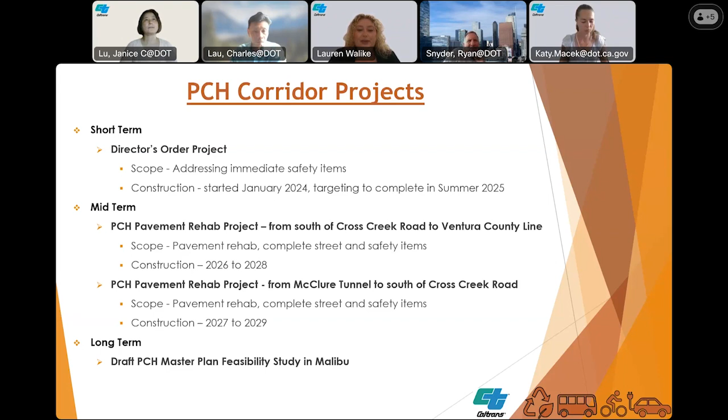You're on mute, Janice. Thank you for letting me know that.

Hi, good afternoon everyone. My name is Janice Lu. I'm the project manager for these two pavement rehab projects. Along with me, my colleague Refugio, who is the design manager, will be helping me present the scope of work as well. I'm going to dive right in.

The first project is this, the north segment of the project. This is about a 16-mile stretch on PCH, going from the south end of Cross Creek Road to the north end at the Ventura County line. Everything is within the City of Malibu.

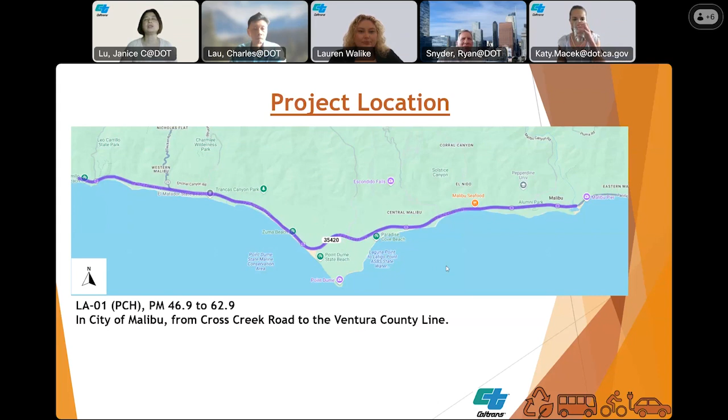The main purpose of this project is to fix the roadway. This will extend the service life of the roadway and improve the ride quality, and also minimize maintenance work, which will minimize maintenance worker exposure. We also understand that there's a lot of safety concern on PCH, so we're also incorporating and upgrading complete street features and safety features.

Next, I'm going to hand it over to Refugio to discuss the proposed scope of work. Yes, good afternoon everyone. I'm going to go over the bullet points and the proposed scope of work for this project. The pavement rehabilitation consists of cold plane and overlay with rubberized hot mix asphalt.

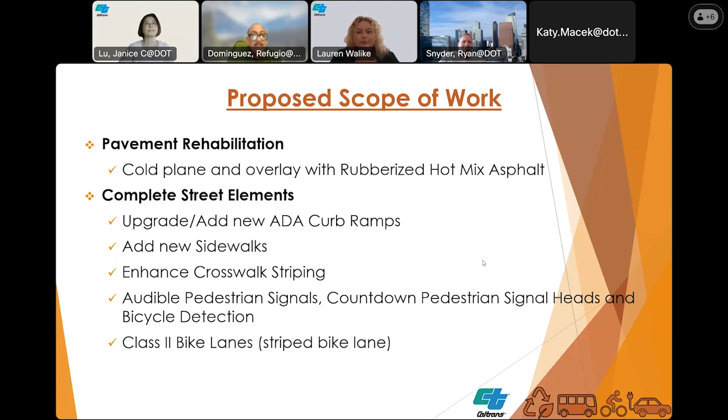As for the complete street elements, we will be upgrading the curb ramps, a total of 22. We'll be adding 6 new sidewalks. We'll be enhancing existing crosswalks, and we'll be doing audible pedestrian signals, countdown pedestrian signal heads, and bicycle detection. We'll also be adding class 2 bike lanes going northbound and southbound.

Regarding safety items, we will be upgrading the guardrail system throughout the project limits. We'll be installing Qwick-Kurbs for traffic channelization in the middle of the median. We'll be adding 20 new lights from the beginning of the project to the end. We'll also be replacing or installing brand new roadway signs throughout the project limits.

We'll be lengthening the northbound left turn pocket from northbound PCH to southbound Heathercliff Road, and doing the same on the left turn pocket from northbound PCH to southbound Malibu Cove Colony Drive. We'll be realigning the existing intersection from Malibu Road to southbound PCH, from a skew intersection to a T intersection, and doing the same at Civic Center Way to northbound PCH.

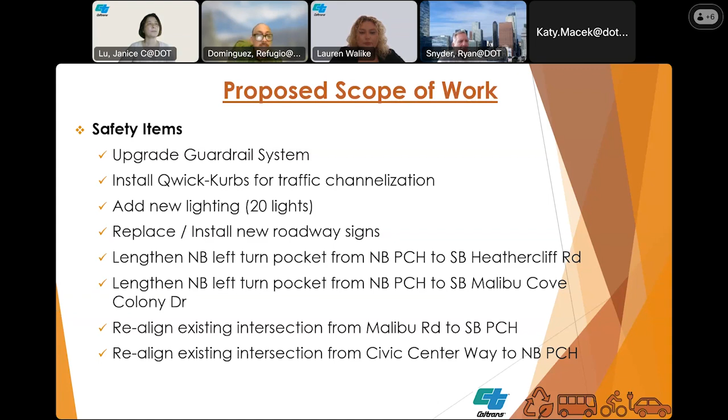Next slide. We have some challenges regarding the bike lane analysis. We would like to have continuous Class 2 bike lanes from beginning to end, but there are four challenges, as we can see on the screen. One is that we would require widening of the existing road at particular points, and that requires a very thick environmental document and process, and we don't have the time due to the project guidelines and delivery we committed to.

Also, we have right-of-way constraints - we don't own the whole right-of-way and we cannot take it. We have parking constraints - we cannot remove parking. And we have roadway lane width constraints, the actual width of the road.

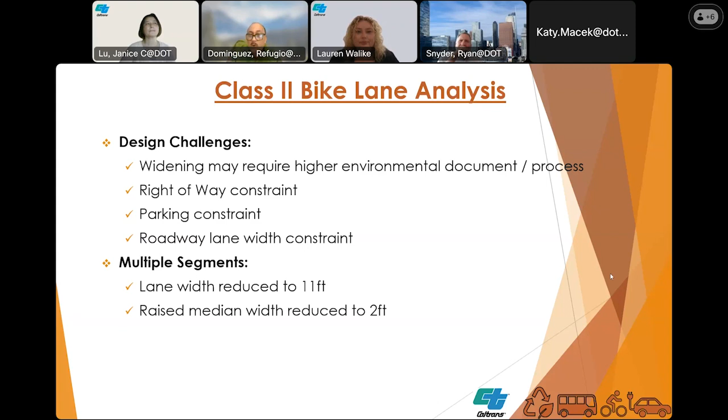Regarding bike lane analysis, where we are putting bike lanes, we'll be reducing the lane width from the typical 12 to 11-foot lanes. And the raised median at particular locations will be reduced from 12-foot to 2-foot median.

For the Class 2 bike lane, as we can see on the exhibit, there are 22 segments going southbound and 22 segments going northbound throughout the project limits. Going northbound, there's going to be 7.7 miles of new Class 2 bike lane. Coming southbound is going to be 7.1 miles of new Class 2 bike lane.

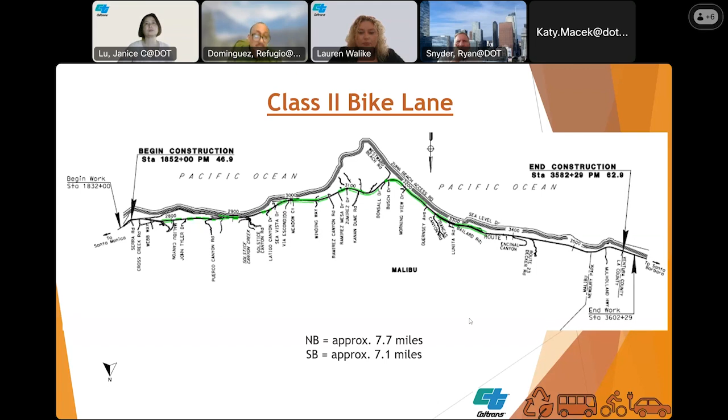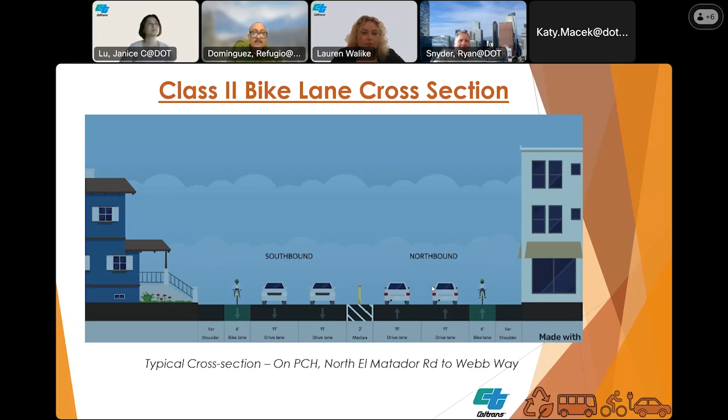Next slide. This is a typical bike lane cross section throughout PCH, from El Matador to Webb Way, which is most of the project limits. There will be a bike lane southbound and one going northbound, next to the existing shoulder. North of El Matador, we will not have bike lanes, only from El Matador to Webb Way.

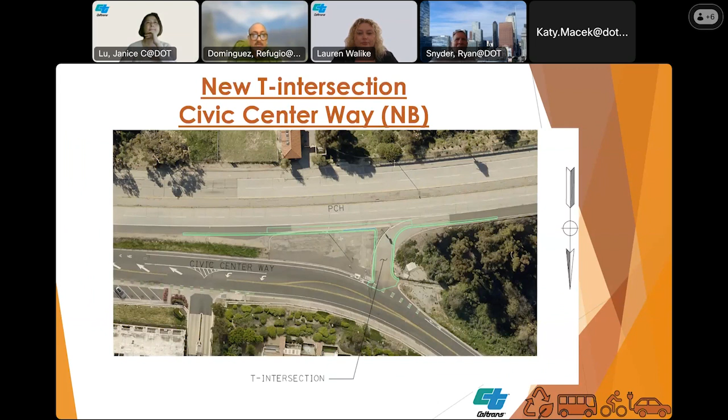Regarding the two intersections I mentioned before, at Civic Center Way we're adding a T intersection, 90 degrees. This is the location where we're adding the T intersection, going northbound. Next slide.

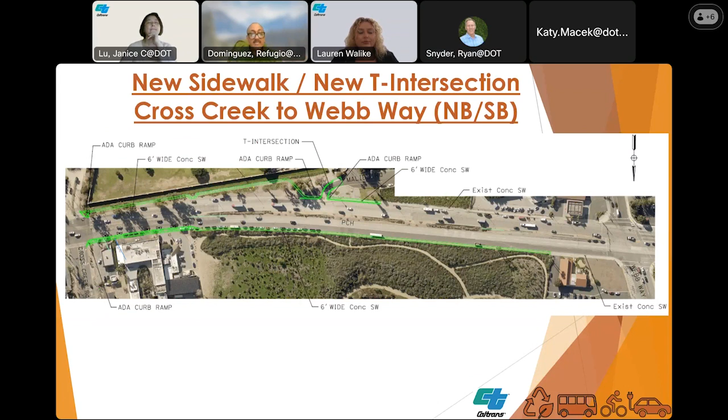Coming southbound, there's a new intersection at Malibu Road - a T intersection, as you can see in green. We're also adding a sidewalk from Cross Creek to the new intersection, as shown at the top of the screen. And if you look south from Cross Creek at the bottom, you can see a green line - that's a new sidewalk we're adding from there to Webb Way.

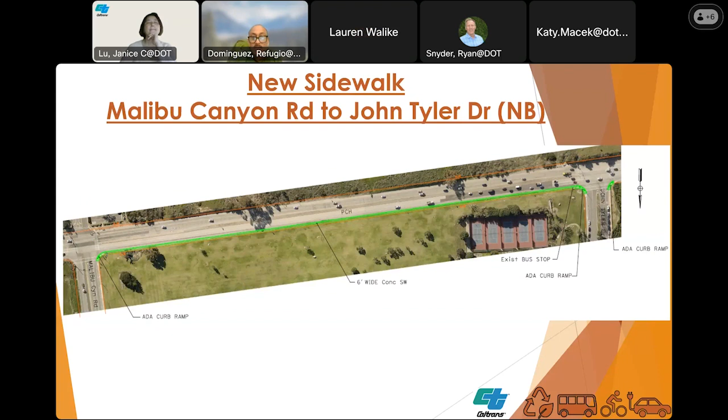Next slide. New continuous sidewalk going northbound between Malibu Canyon Road and John Tyler. I think Pepperdine owns that green area. Next slide.

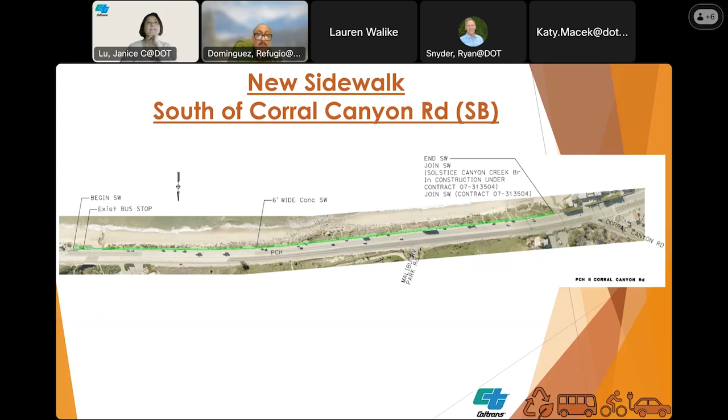New sidewalk south of Corral Canyon. This is going southbound from Corral Canyon up to a big stretch - I forgot exactly how many feet, but it's a continuous sidewalk that we will be adding. Next slide, and Heathercliff.

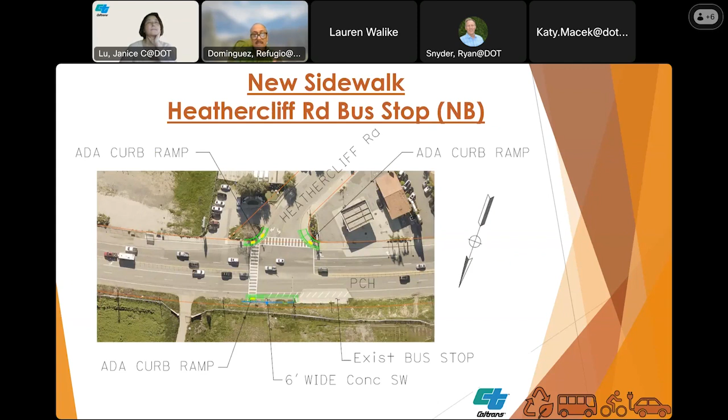At Heathercliff, we have a bus stop going northbound. We're going to add a piece of sidewalk so people can continue with a crosswalk, and then when they reach the light, they can use the crosswalk to cross and go to the other side. Next slide.

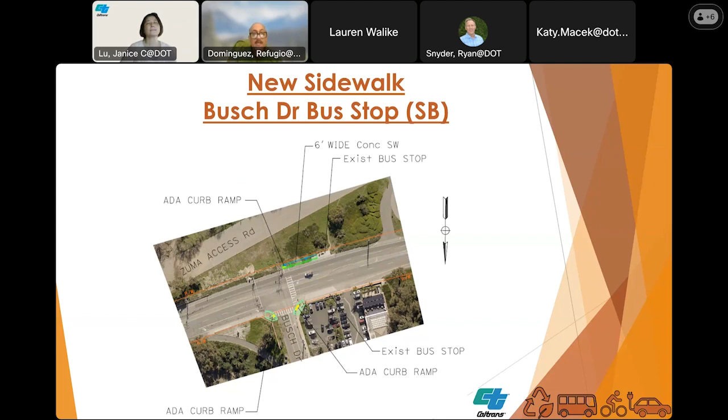At Busch Drive, there is a bus stop but no sidewalk, just a little piece. We'll be extending it so it's continuous, so the sidewalk will go to the crosswalk and the pedestrian can cross. Next slide.

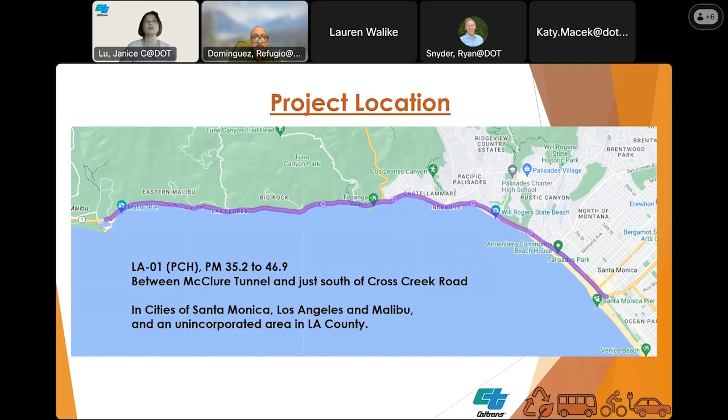That wraps up our first segment with the north segment. I'm going to dive right into the south segment of the project. Project location for this one is about 11.7 mile stretch on PCH, covering 4 cities on the south end. Starting from the south end, it goes from Santa Monica, then to the city of Los Angeles, then to the unincorporated area in Topanga, and finally to the city of Malibu. Post miles about 35.2 to 46.9, from McClure Tunnel to Cross Creek Road.

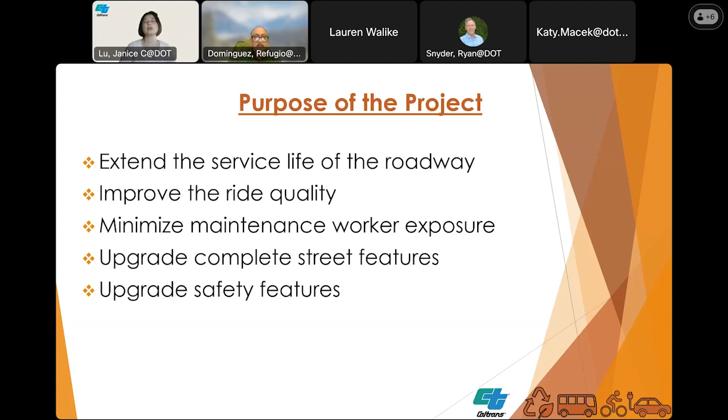Similar to the other project, the purpose of this project is to fix the roadway, extend the service life of the roadway, improve ride quality, minimize maintenance work and worker exposure, and also upgrade the complete street features and safety features.

I'm gonna hand it back to you, Virgil. Yes, like Janice mentioned, the scope of this project is similar to the other project on the north side. But still, I'll go over the key points, which is cold plane and overlay with rubberized hot mixed asphalt. We're gonna replace the structural section. There are many locations where the pavement is not just needing an overlay but needs the whole pavement replaced at certain specific locations. So we'll be doing that at this project, especially now that due to the fires, there's a lot of trucks doing improvements, excavation, hauling dirt from left to right, and the pavement is getting damaged. So for this particular project, we will be replacing structural sections at those specific locations.

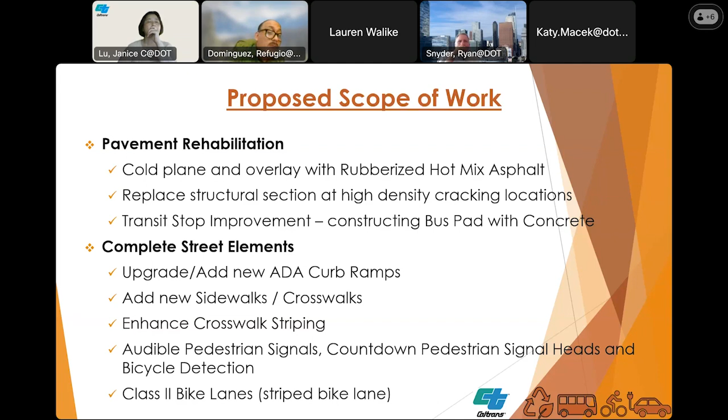Also, there are 30 bus pads that we will be replacing the pavement from asphalt to concrete, which lasts longer. Regarding complete street elements, we will be upgrading 22 curb ramps, ADA curb ramps. We'll be adding 2 new sidewalks, 2 new crosswalks, and enhancing all the existing crosswalks. Since we're gonna do an overlay, everything will be restriped brand new. Similar to the other project, we'll have pedestrian signals, countdown pedestrian signal heads, and bicycle detection. And regarding the other project, we're also gonna be adding class 2 bike lanes within the limits of this project.

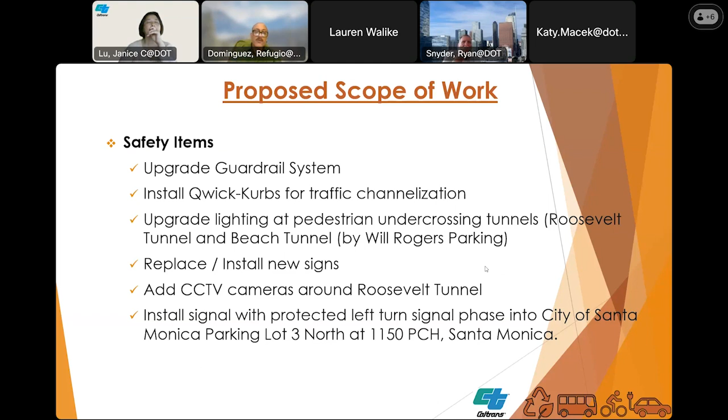Regarding safety items, we'll be upgrading the guardrail system. We'll be installing Qwick-Kurbs for traffic channelization in the median. We'll be upgrading lighting at the 2 tunnels that we have, Roosevelt Tunnel and the Beach Tunnel inside lighting. We'll be replacing and installing new signs throughout the project limits, and we'll be adding CCTV cameras for safety around the Roosevelt Tunnel. Also, we're gonna be installing a new signal with its own left turn phase going northbound on PCH to the Santa Monica parking lot 3 north, which is on the beach side. The address is 1150 PCH.

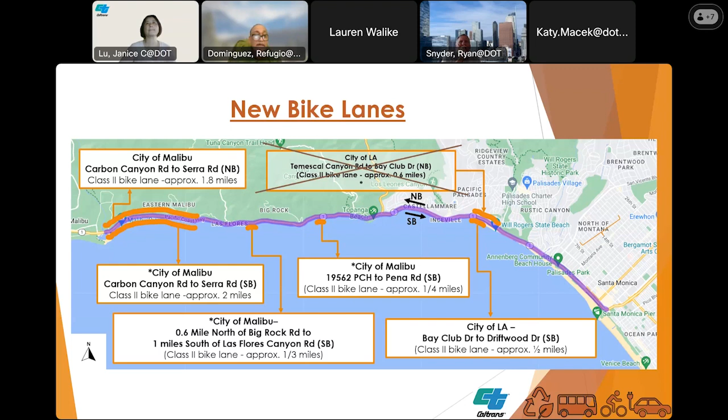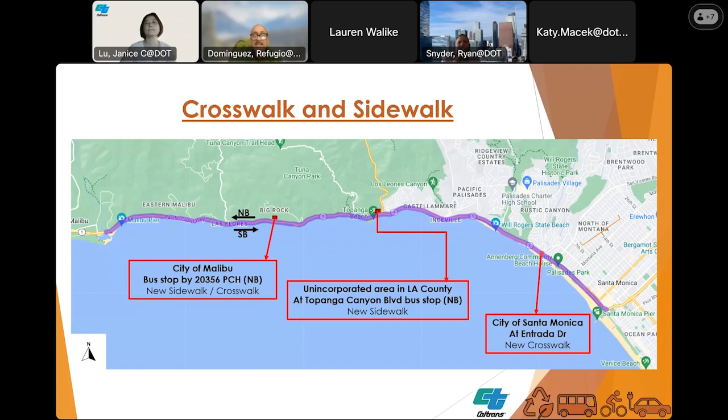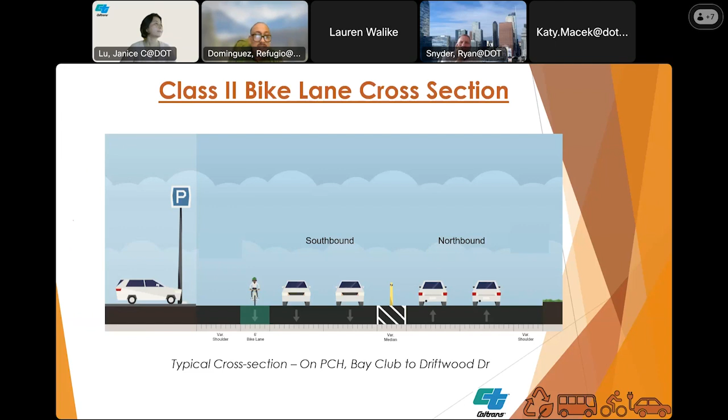This is a typical class 2 bike lane cross section on PCH from Bay Club to Driftwood Drive. Within this stretch, we're proposing a bike lane only on the southbound side, close to the beach. The northbound side used to have one, but due to the landslide and safety concerns, we removed it from this project.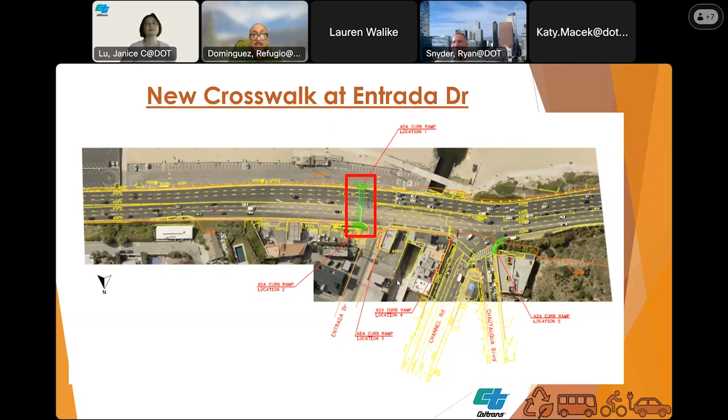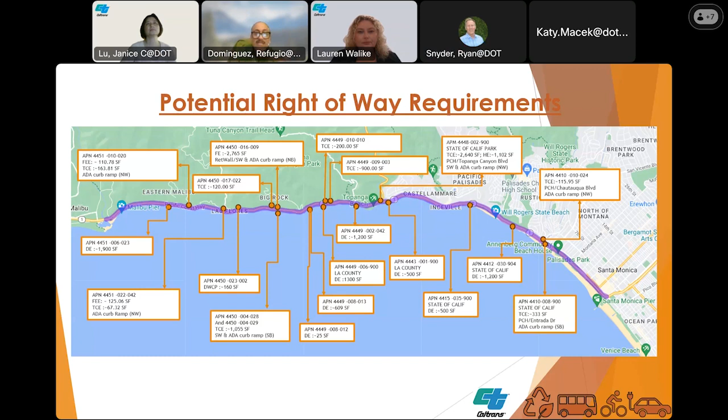For this project, there are many right-of-way needs. We need either temporary construction easements, permanent easements, or drainage easements, regarding the sidewalks, curb ramps, or drainage systems we're proposing. A lot of the work at 19 locations is outside our right of way, so we need to talk to the respective owners and acquire those rights. This exhibit shows the 19 locations where we need to work with private owners to obtain permanent or temporary access.

For this project, we're currently in the project approval and environmental document phase, hoping to wrap it up in a month or so. This phase will finalize the scope of the project and finish the environmental document. After that, we'll start design, hoping to finish by end of 2026. Construction is estimated to start the following summer, 2027, through sometime in 2029.

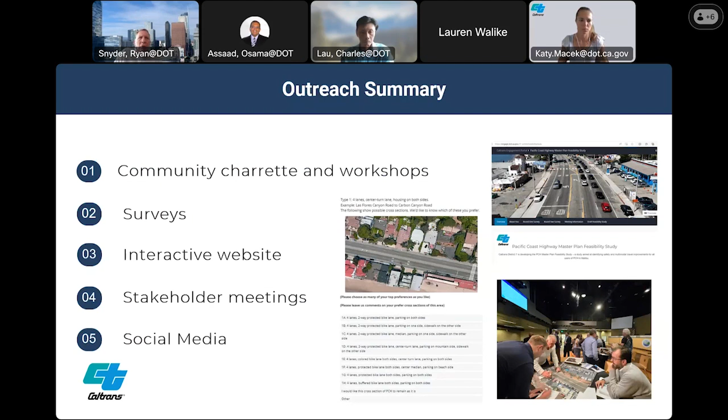There will be more opportunity to have a say-so in this. We have done pretty extensive outreach. We started off back in the summer last year with a community charrette and various workshops. We did two rounds of surveys. We have our interactive website. We've had stakeholder meetings with individuals and different stakeholder groups, and we've been posting on social media as well.

One of the most important things that I want to highlight is that we've tried to apply a toolbox. We came in here with the charge of making PCH in Malibu safer. Historically, it has not lived up to what we would like it to be. The community has been very, very clearly asking for us to do something safer, and so we're trying to do all of these things that we can to make it safer.

I also want to point out a number of things that through our community engagement that we've done, we asked the question in our surveys, what about just leaving the highway as it is? And that option came in dead last every time we asked that question. So people want change. I also want to stress that we have limited right of way, and to add something, we have to give up something.

That's the challenge - trying to balance all the different goals of making things safer and improving access for people walking, bicycling, and using public transit, while making it a nicer community that fits the context. There are a lot of trade-offs, and we've gotten pressure from one side asking us to do this, and another group telling us they want the exact opposite. So we've had to balance as best we can.

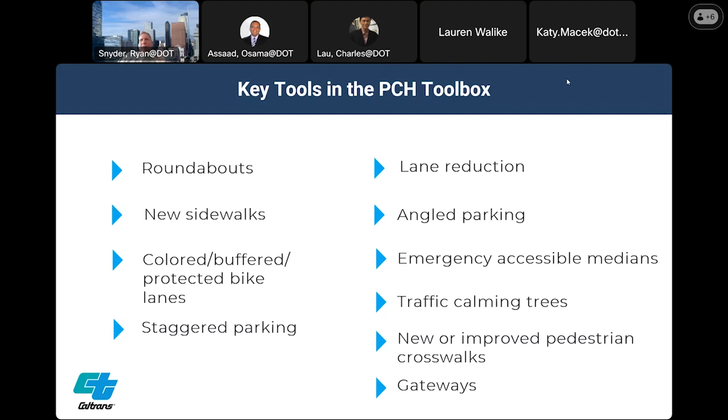But roundabouts are a tool we're using at 9 different locations, which I will show. We're adding new sidewalks at some places, and in some places we'll have either colored and buffered or protected bike lanes, and staggered parking. These are the 9 locations where we're planning roundabouts.

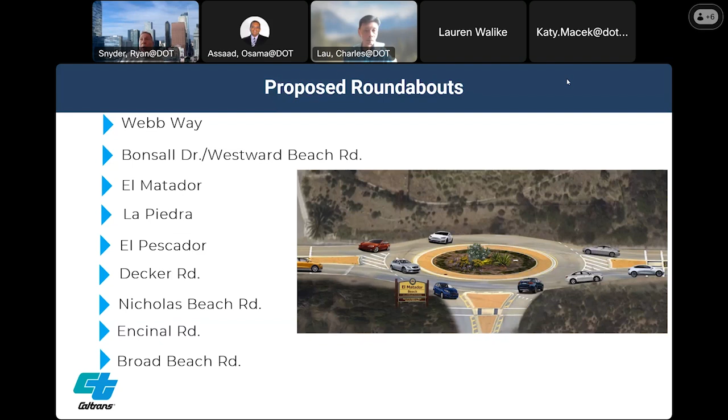Webb Way is the only multi-lane roundabout in this group. It's also an opportunity to create a gateway into the center of Malibu. All the other locations are proposed roundabouts, especially at T intersections where somebody's pulling out from the side onto a busy highway. We believe these will go a long way in improving safety there.

We've proposed some sidewalks, and some of these overlap with what you just saw in the previous presentation. These are required by Senate Bill 960, which says we have to provide sidewalks and bicycle facilities on state highways. From Las Flores to Carbon Canyon Road, we're planning to add sidewalks where none exist. A little further north, there are locations where sidewalks exist, but there are spot locations where a tree, mailbox, or something else is blocking the sidewalk, and we need to remedy that.

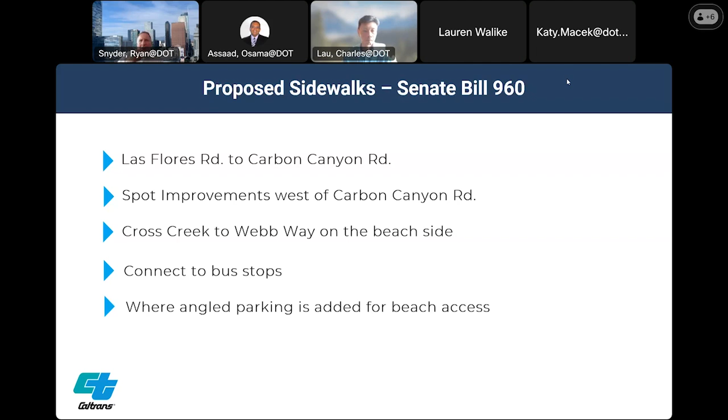We're adding sidewalks from Cross Creek to Webb Way on the beach side. We're connecting to bus stops, and that's where a lot of overlap with the previous presentation exists. We'll also add angled parking for improving beach access - we'll see more about that later - and where we do that, we'll add sidewalks so people have a better way of walking to the next destination.

These areas in blue are where we're proposing to add sidewalks: again, Las Flores to Carbon Canyon, Cross Creek to Webb Way, at John Tyler Drive where there's a bus stop, and at Kanan Dume where there's also a bus stop. These other 4 locations at the north end are where we're looking at providing angled parking and adding sidewalks.

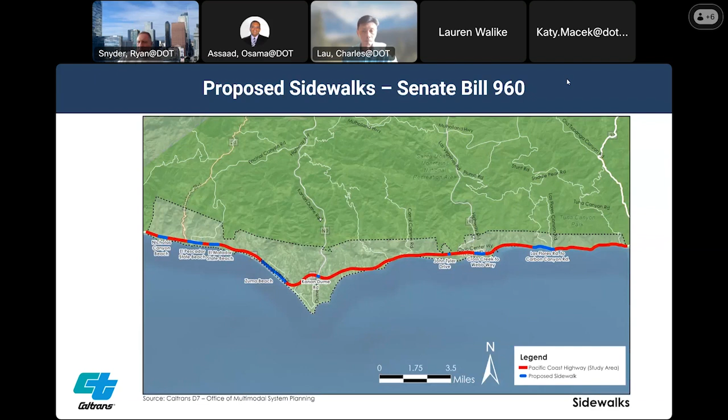We're also adding buffered, colored, and/or physically protected bike lanes pretty much throughout the entire route. We have the option to provide both along the entire route. This is another one of those areas where a large group of people told us they only want protected bike lanes and nothing else is good, while another constituency group told us they can't do protected bike lanes - they would definitely oppose any bike lanes with physical protection. So we're leaving that option open.

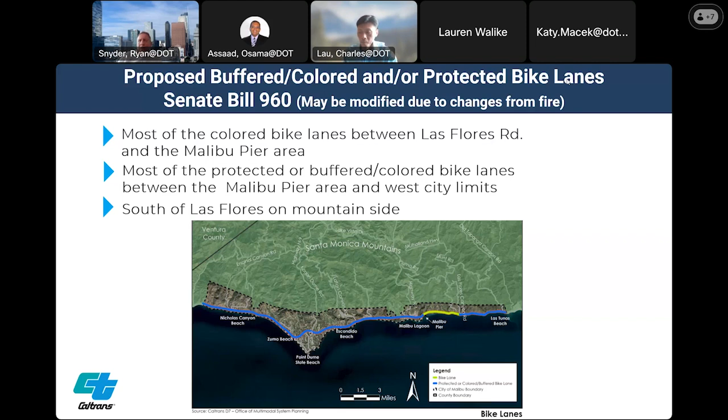The one area between Las Flores and the pier is where it's going to be a buffered, colored bike lane rather than physically protected. The reason is all the on-street parking there next to driveways - sight visibility is not good at all. There are homes that come right up to the driveways and the highway with structures, shrubbery, and trees, so people coming out of those driveways cannot see a bicycle being there. With the on-street parking, that creates more visibility issues. So we believe the best option there is just striped and buffered bike lanes.

We're proposing staggered parking where it makes sense. In the west end, there are places where we've removed parking on one side. The reasons are: first, we want to eliminate people parking on the mountainside and running across the road; second, we want to eliminate people parking on one side and walking along a very narrow strip along the highway; and third, we need to make space for continuous bike lanes.

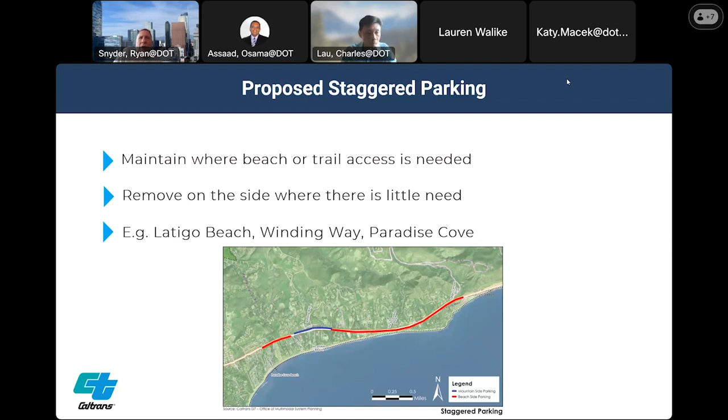For the most part, we've preserved parking on the beach side and eliminated it on the mountain side. The one exception is near Winding Way, where the trailhead for Escondido Falls exists - there we preserved parking on the mountain side, since it's a greater distance to walk to the beach where the greater demand would be, so we're not permitting it on the beach side there. Then as we get closer to Paradise Cove, we swap that back to the beach side.

Once we get west of Trancas Canyon, we're looking at reducing the number of travel lanes to two, or maybe two with some passing lanes staggered. This gives us the opportunity to add reverse and angled parking near some of these key beaches: El Matador, La Piedra, El Pescador, Nicholas beaches.

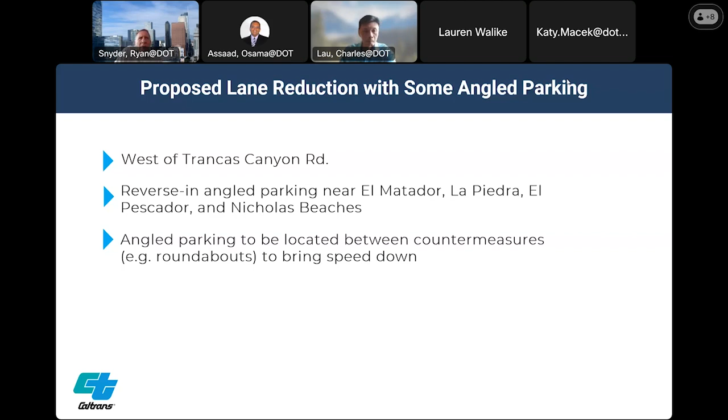Also looking at angled parking near Webb Way, to improve access. There are places where we've eliminated parking, but in order to replace what we lost, this reverse angled parking will give us an opportunity to replace some of that parking. So we're actually adding more parking than we're removing.

At the new pedestrian or improved pedestrian crosswalk, some places we're just improving the crosswalk, other places we're adding new crosswalks. We're looking at the area especially between the pier and Las Flores. Those crossings are difficult, and we need to make that area safer.

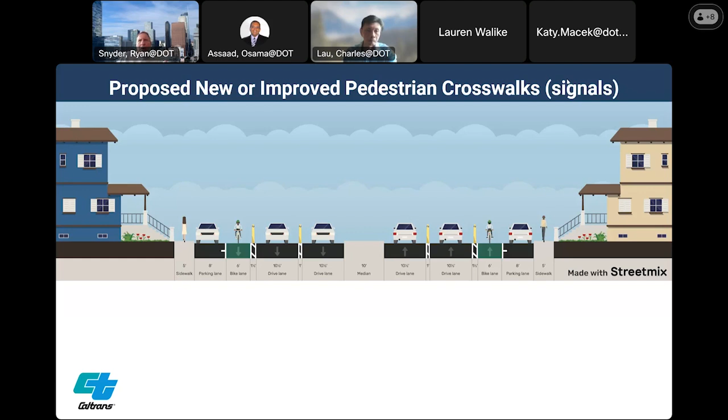We want to slow the cars down there. We would love to lower the speed limit, but state law prevents us from just posting another sign that we like, so we're looking at different techniques to try to slow the cars down. At these crosswalks, we're looking to channelize it with quick curbs, something like this photo rendering here, maybe some island, maybe some raised crosswalk. We believe this sort of treatment will help slow the vehicles down.

And if the crosswalks are spaced not too far apart, I think we can help to bring down the prevailing speeds in those areas.

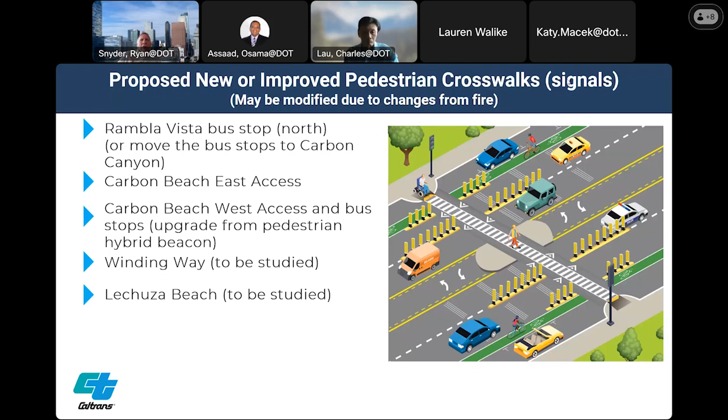Some of the new improved crosswalks we're looking at are at the Rambla Vista bus stop on the north side, or that bus stop might move to Carbon Canyon. We're looking at Carbon Beach East access—there's a beach access there that needs a good crossing. Carbon Beach West access, where there are bus stops, we're going to upgrade from the pedestrian hybrid beacon to a full signal, and also studying new crosswalks at Winding Way and Lechuza Beach.

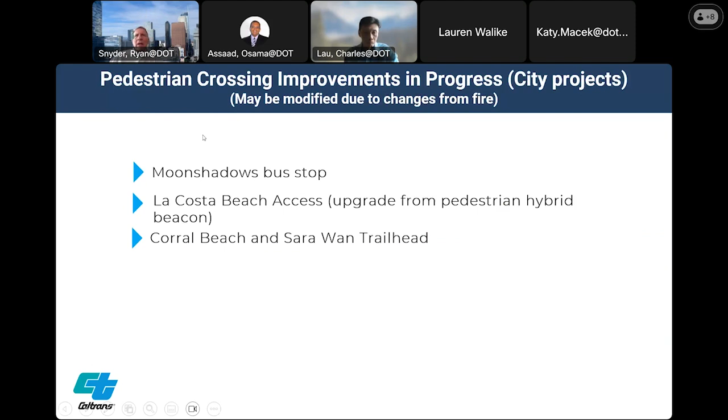These are some of the other crosswalks the city is already working on: the Moonshadows bus stop, La Costa Beach access—again upgrading from pedestrian—and Corral Beach and Sara Wan Trailhead. Those are some other places we're looking to improve the crossing. This map shows where some of those pedestrian crossing improvements exist.

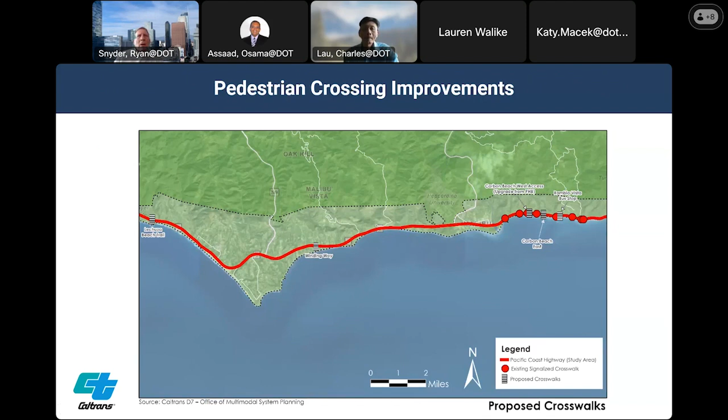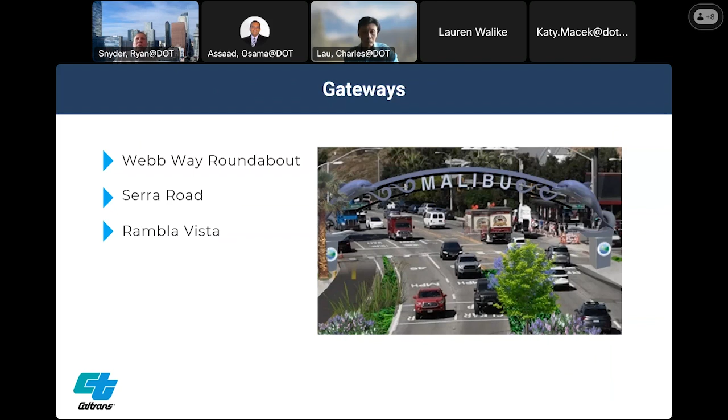Also looking at gateways, which was something that proved quite popular. There are three possible locations: the Webb Way roundabout, one perhaps at Serra Road, and perhaps coming from the south at Rambla Vista. Gateways signal to the motorist that you're entering a new context and need to respect that new context, so hopefully we can help slow the vehicles down. It's also an opportunity to incorporate some public art, to make the gateway artistic.

Now I want to show some of the cross sections. I have all of the cross sections here, but in the interest of time I'll show some of the cross sections we're looking at, and again there are alternatives for many of these locations.

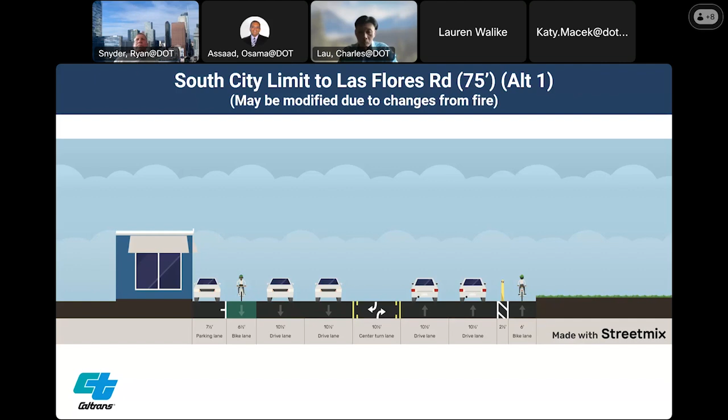This is the South City limit to Las Flores Road—this is our first alternative, where it's 75 feet. All of these things may change due to anything that happened with the fire. At this location we would have separated bike lanes on the mountain side, and a striped and colored bike lane on the beach side. We can't have separated bike lanes there because that would block off people's access to parking at their homes on the beach side, but on the mountain side that's a possibility.

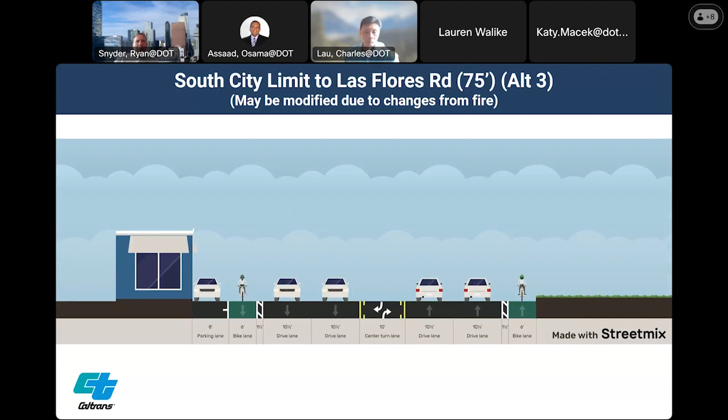Another option at that same location would be two-way separated bike lanes on the mountain side, or a third option would be to have a colored and buffered, painted buffer bike lane on both sides.

Las Flores Road to Rambla Vista—we're very constrained here, only 77 feet wide. We don't have a lot of space to do what we need to do. We do need to add sidewalks, we do need to add bike lanes, so here we're proposing to take out the center turn lane to create the needed space.

Rambla Vista to Carbon Beach Terrace—this is a residential area, about 85 feet wide. This option would preserve the travel lanes, add colored buffered bike lanes, preserve the parking, and possibly reserve the median for emergency vehicles only.

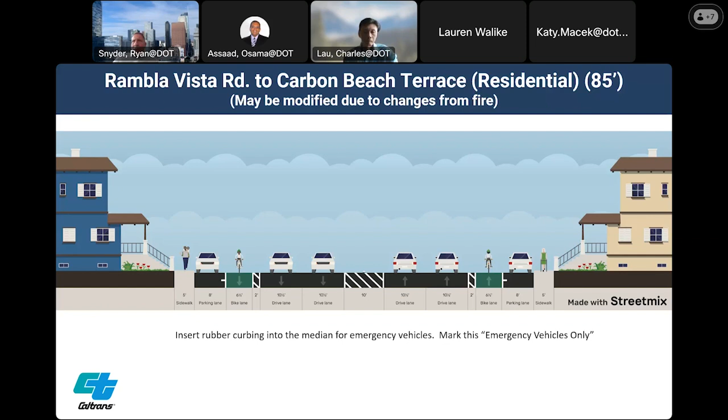Carbon Beach Terrace to Serra Road. There are different options, and this is the center part of the city. This is where we had a lot of people tell us that they would like to modify the character to make this more like a main street, to make this more like a boulevard. So we've got 3 different options for this, and I want to stress that all of these options involve trade-offs. There's things that we add that people like, and there are things that we take off that others don't want.

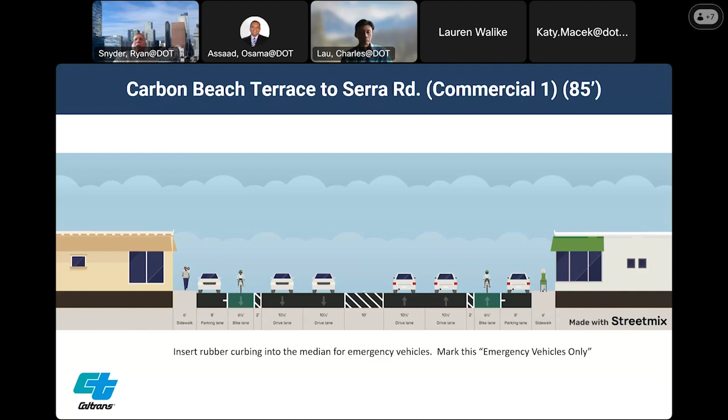So here on this one, this is the simplest option, adding the colored buffered bike lanes. Option 2 really goes further to make this more of a main street boulevard. We're substituting planted landscaped islands in the middle for the turn lanes, and having the bike lanes on the side. The third option - I'm sorry, this is the second option here.

So again, trade-offs - it looks nice, it does help to slow the vehicles down, it does create a better environment. The trade-off is that the center turn lanes are gone, at least in some areas. The islands could be staggered, but emergency access would be compromised in this particular area. That's part of the trade-off.

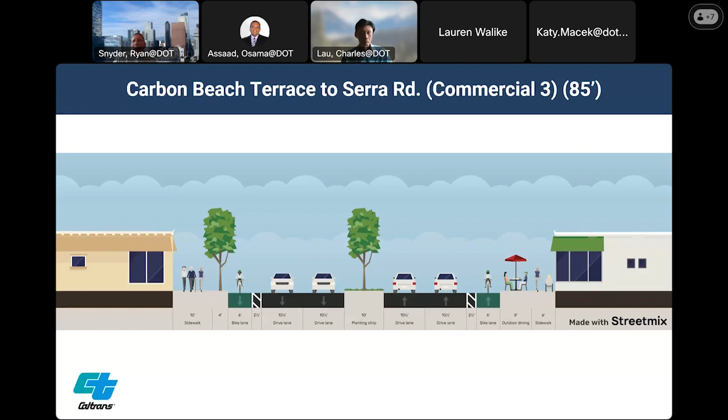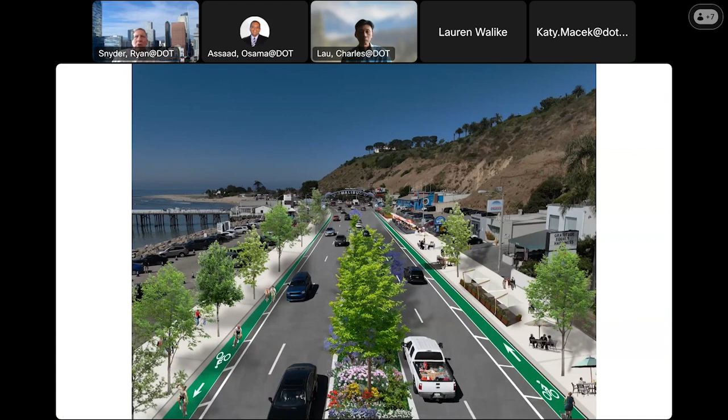Another option would be to eliminate parking on street in this area and widen the sidewalks even further. Add outdoor dining space, add more landscaping - this is the option that does the most for creating a nice atmosphere, a boulevard, Main Street environment. But the trade-off is that the parking is gone. So options for people to consider, with pros and cons with all of these.

Moving further north, Serra Road to Cross Creek. One option is the separated bike lanes with the physical barrier. Another is without the physical barrier, but colored and painted buffer bike lanes in there.

Cross Creek to Webb Way. This is an area where it's pretty wide, and we're looking at adding the angled parking, so there's improved beach access, adding that on the beach side. These are physically separated lanes for one option. The second option replaces the physically separated bike lanes with just the colored and buffered bike lanes. But we're adding a sidewalk on the beach side in both cases.

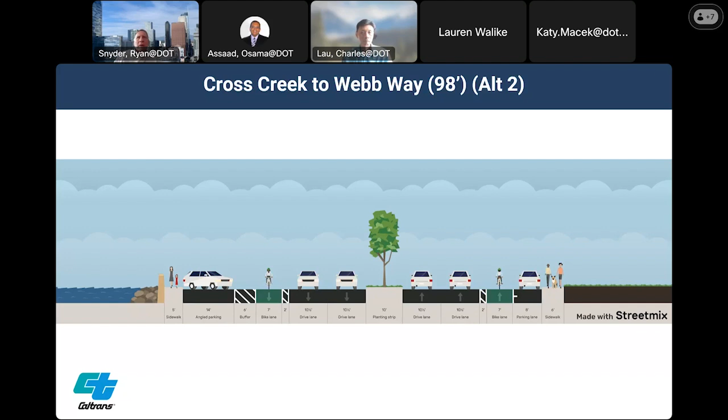And now Latigo Canyon - this is essentially up to Zuma Beach Road, or up to Zuma Beach. One option is the physically separated bike lanes. Another option is the colored buffered bike lanes. And I want to stress that in this area, we are removing parking on one side. I want to go back here - we are removing parking on one side. We're leaving the parking on the beach side.

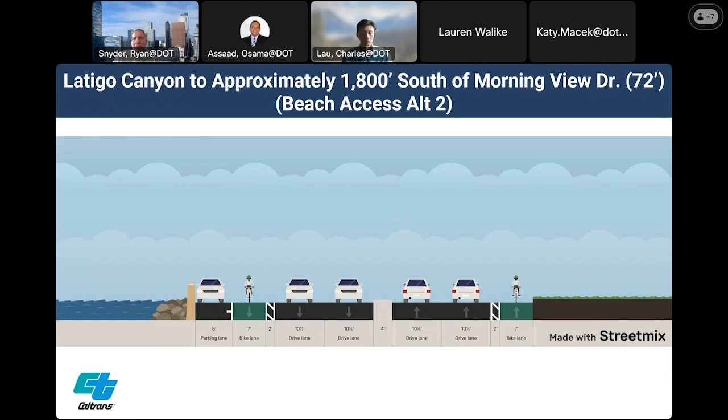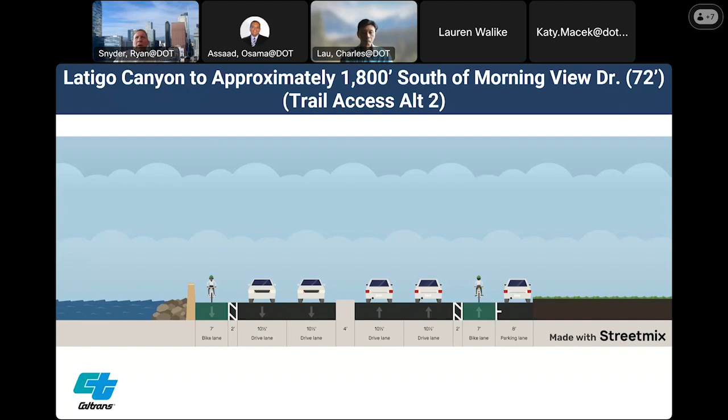And then when we get to that area near Winding Way, we're removing parking on the beach side and adding parking on the Winding Way trail side. And again, an option here for colored buffered bike lanes instead of the physically separated bike lanes.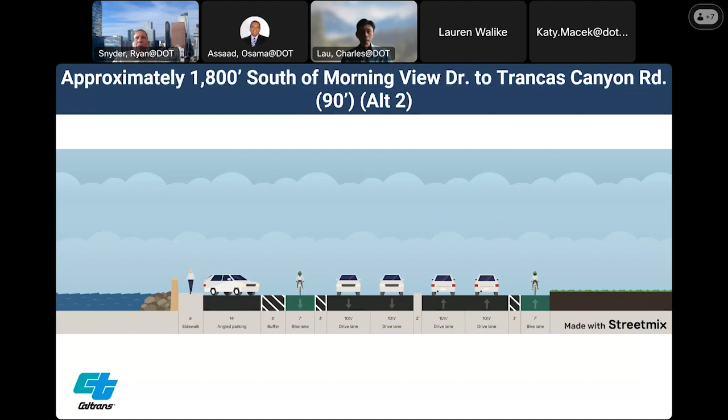Now this is the Zuma Beach area. There's some more space to work with here. This is with angled parking - we're increasing the number of parking spaces. This option here would add physically separated bike lanes and a sidewalk along with the angled parking. This other option would add the angled parking and the sidewalk, but have colored buffered bike lanes instead of the physically separated bike lanes.

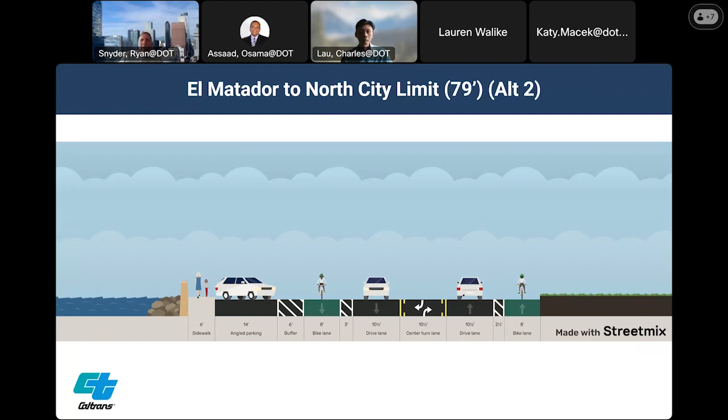And then El Matador to the north city limits. Again, this is that area where north of Trancas, we're looking at bringing this down to one lane in each direction, or a lane plus some passing lanes. But here's an opportunity - the extra space gives us an opportunity to add the angled parking, add the sidewalk on that side, physically separated bike lanes, or same thing with the colored buffered bike lanes.

Now, those are the linear improvements that we looked at. We also looked at intersection improvements at the intersections - the top 11 intersections that had the most collisions that we looked at. And at each one of these, we're proposing intersection improvements.

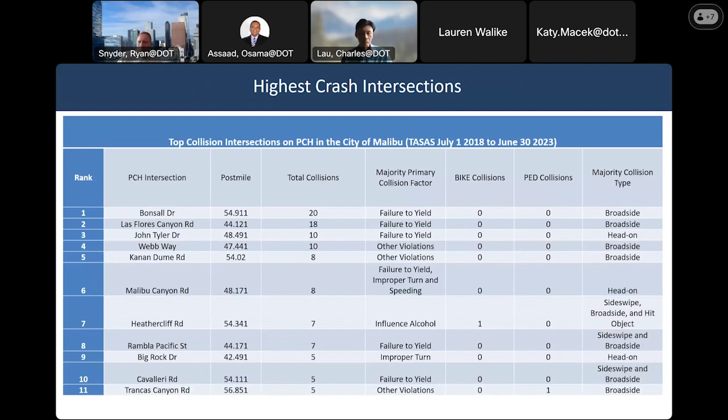I'll show you some of the main ones here. This one is at PCH and Westward. So one option is to straighten out that intersection coming out there from the north side, the mountainside. Another option is to create a roundabout. Roundabouts don't have to be round, but this option here would change the character of that intersection, and it would eliminate a lot of the conflicts.

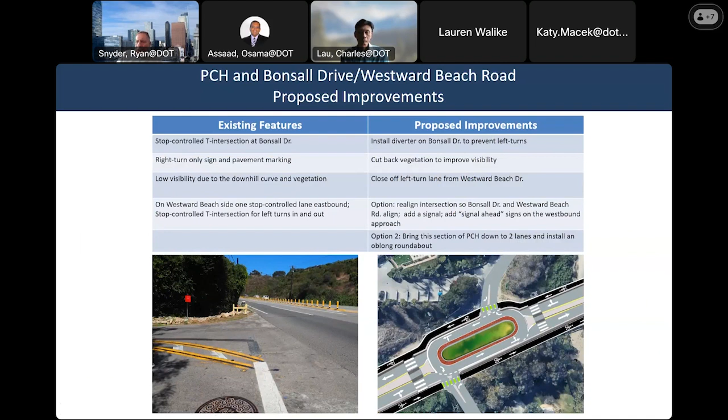So there's different things we're looking at for those intersections. Here's the proposed multi-lane roundabout at Webb Way. This is a 7-lane intersection right now. One of the nice things about roundabouts is that we don't need turn lanes. That gives us an opportunity to bring the intersection in some, to add some landscaping and some beautification. And by the way, roundabouts slow the speed at which people travel through the intersections, but they also have about 30% more capacity because you don't have to stop at them. So there's a lot of benefits to roundabouts.

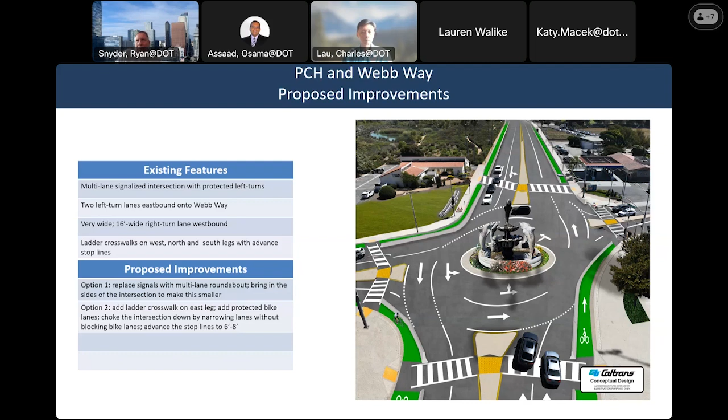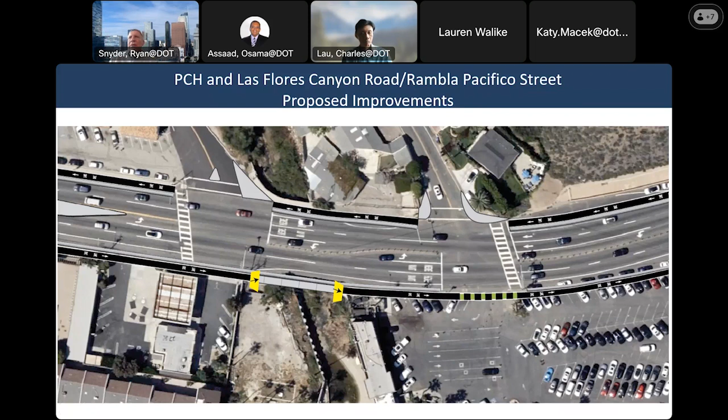And this is a complex intersection here at Rambla Pacifico and Las Flores. We're proposing a lot of changes to these intersections with extensions of the curbs here. We want to slow the vehicles down. We're looking at new sidewalk over here, especially over the bridge, and I know there are other projects going on at this bridge. Physically separated bike lanes here are a possibility. Median extension here, islands over here, just to slow the cars down, to create a feeling of narrowness and try to tame that intersection down a bit.

So other things we're looking at, and this may be perceived as more futuristic, but these things are coming pretty quickly. Vehicle to everything communication equipment can really help us do a lot that we can't do. Our toolbox is limited. We're trying to accomplish a lot of things with a very limited toolbox, but we're adding things to this tool with this communication.

The city has gotten permission and state law passed to allow speed enforcement with cameras. So that's starting. Cameras that communicate in real time with the sheriff, so if there's somebody going 80 miles an hour, the sheriff can be notified quickly.

Today's technology will allow for communications to warn of safety hazards, but one of the things we'll need is that the greatest benefits will occur when motorists also have the transponders, the trans receivers, so the communication goes both ways. Emergency vehicles will be able to communicate to drivers that they need to get through.

And in the long run, communications to drivers when they are speeding, and even to the extent of modifying the speed that vehicles are able to go. And the city is right now considering modifying all signals to a safety adoption system.

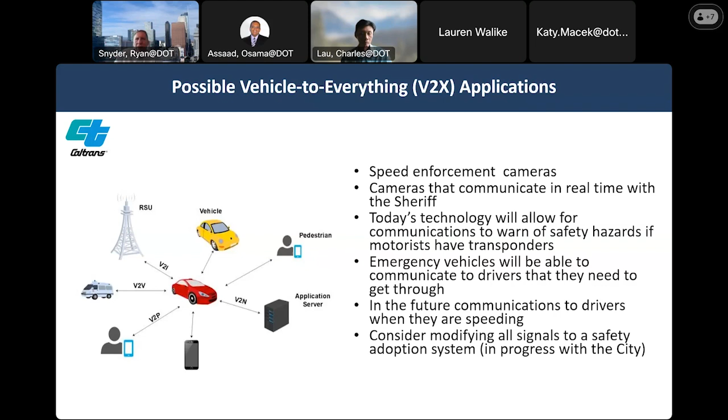So a table with the parking analysis, as I mentioned, we're proposing the possibility of removing parking on one side of the highway, and you'll see the on-road spaces lost there. Between the east city limit and the west city limit comes to about 1,375 spaces. But we've gained about 2,275 spaces with the angled parking. So there's a net gain of 900 parking spaces.

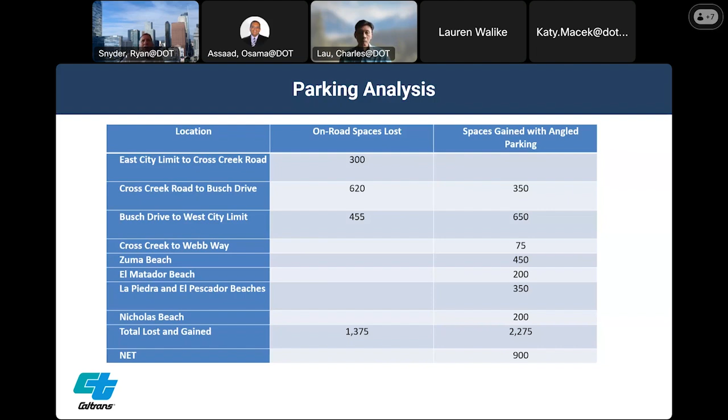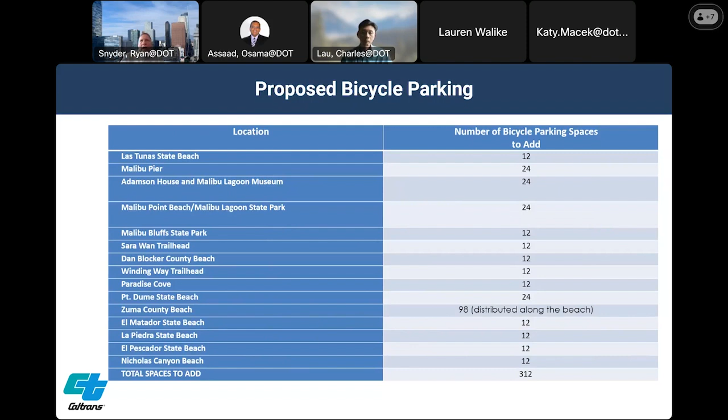And we're proposing to add some 300 bicycle parking spaces. With the bike lanes, more people will bicycle, and it'll make it safer and more possible for people to bicycle. And if they've got a good place to park, we can actually add some more capacity that way.

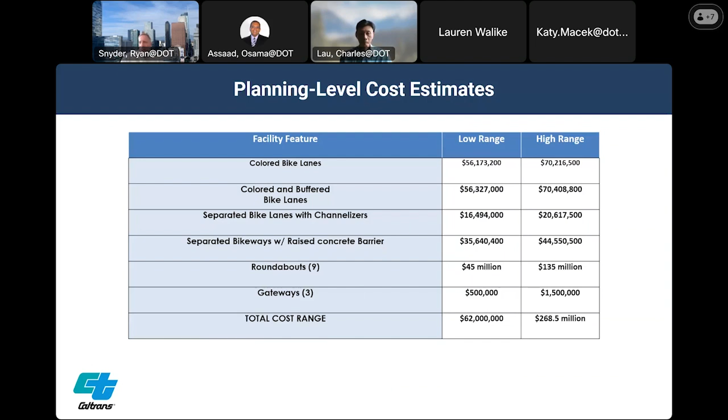And then we've identified some potential funding sources. There are state and federal sources we could look at. There are local sources we could look at as well. And I want to point out that the timing on this, and we're going to talk about that next, depends on when the funding can come in.

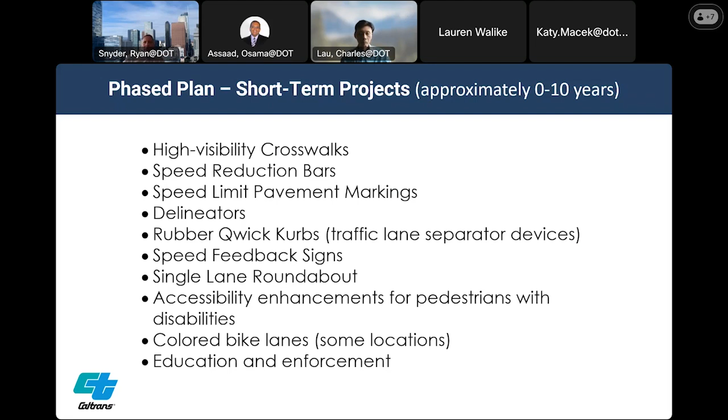The short-term projects, we're looking at maybe the next 10 years or so. A lot of the striping, the speed reduction bars, speed limits, Qwick Kurbs, things that can be put in quickly. Some of the single-lane roundabouts, some of the colored bike lanes.

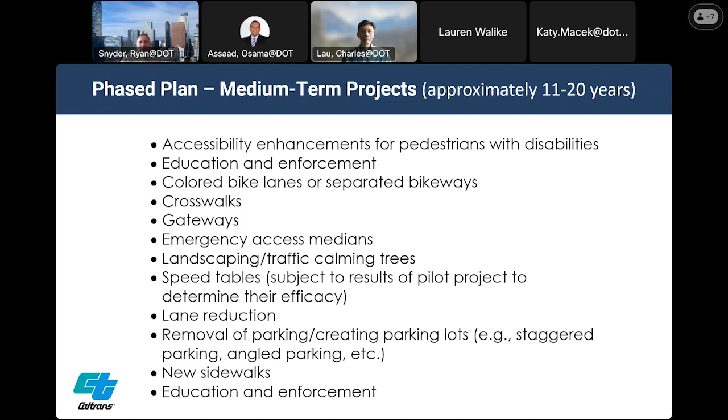Medium-term projects could be in the 10 to 20, 11 to 20 year time frame. Accessibility enhancements, more colored bike lanes or separated bike lanes, crosswalks, gateways, some of the things in this list, speed tables, things that have more physical modifications involved, more concrete involved.

And then the long term, we're looking at up to 30 years or so, a multi-lane roundabout at Webb Way, lane reduction on the north end. And we talked about the possibility of putting in a shuttle system with parking lots along the way, and an option in the plan called the National Park-like option, which would actually remove a lane of traffic and make it a bus lane, but would have lots of buses running, shuttle buses, and parking lots to connect to those. That would take a longer time, primarily to find the funding.

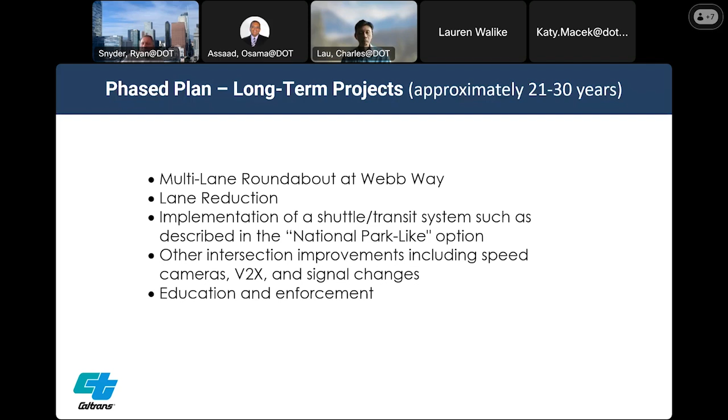Other intersection improvements, including speed cameras, V2X, and signal changes. So that concludes the presentation.